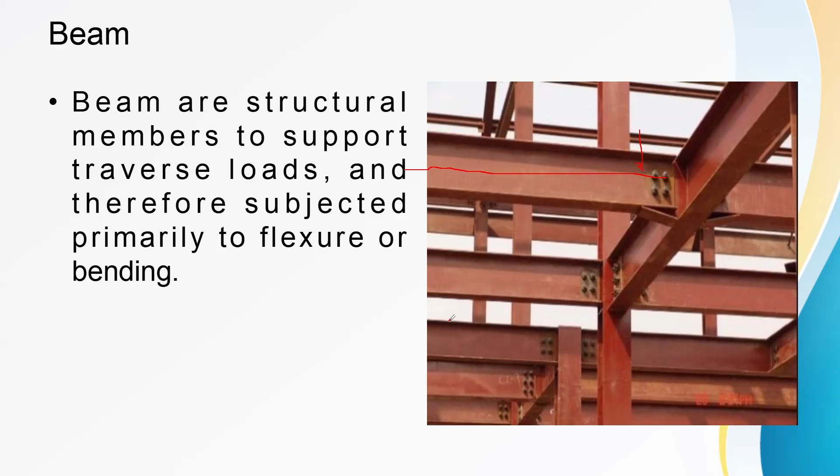We have three types of beams or flexure members that are used to support our slabs. We have our joist, which is the smallest among the three and is used often and abundantly to act as secondary support to ceilings or floors.

The loads carried by the joist will be transferred to the beam, and the beam is relatively larger or bigger than the joist but is usually smaller in number. This provides primary support to ceilings and floors.

Lastly, we have the girders, which are the biggest and strongest among the three and are used on large-scale projects such as bridges and flyovers to transfer loads. The loads carried by the girder will be transferred to the columns that support it.

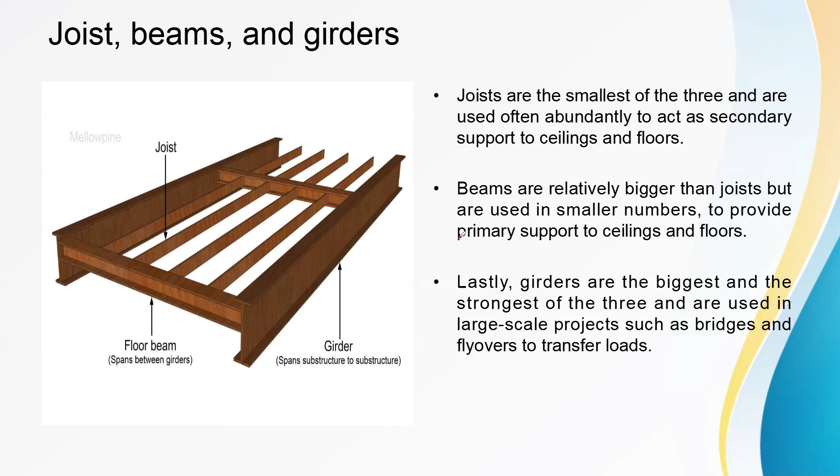Aside from these three, we also have different types of flexure members, and one of them is our purlins, which receive the loads from our roofs. This purlin is supported by our trusses. These purlins are considered members subjected to biaxial forces since they carry loads acting on its y and x-axis.

We also have this type of beam, which is a specialized type of beam that supports loads on the openings of our wall, and these openings can be a window or door. A beam is provided here in order to carry the load over our openings, because if we don't put a beam or support, our hollow blocks or masonry units above the openings would fall or get damaged right away. We call this beam a lintel beam.

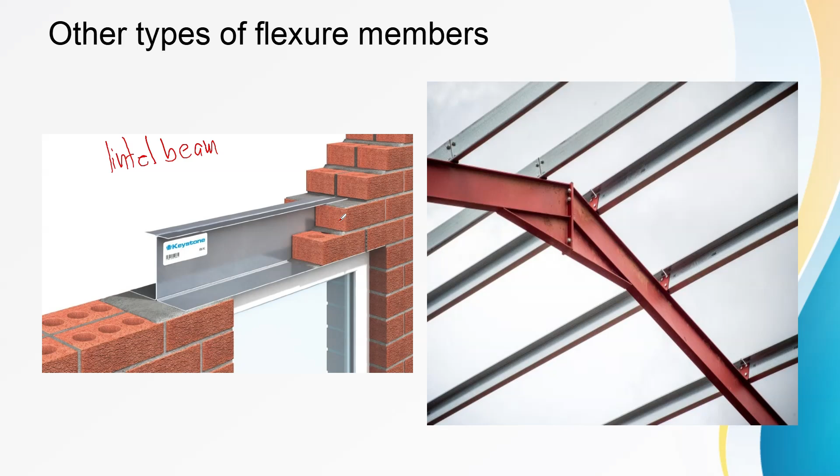Upon knowing what flexure members we will be analyzing, it is also important to know the common sections that we will be using for these flexure members. Most commonly, we will be using our I-shape section. We have several types of I-shape sections; some have a slender flange and a slender web, and we also have I-shape sections that are not doubly symmetric, like this one, which is singly symmetric.

We also have our channel sections, which will be utilized as part of our roof framing system, especially as purlins. That's why they're called C purlins, because their shape is like a C, hence C purlins or channel section.

We also have our hollow structural section here, as well as a circular hollow structural section. We can also utilize our angle section as well as T-section as flexure members, but these are rarely used. We also have circular bars and flat bars or rectangular bars.

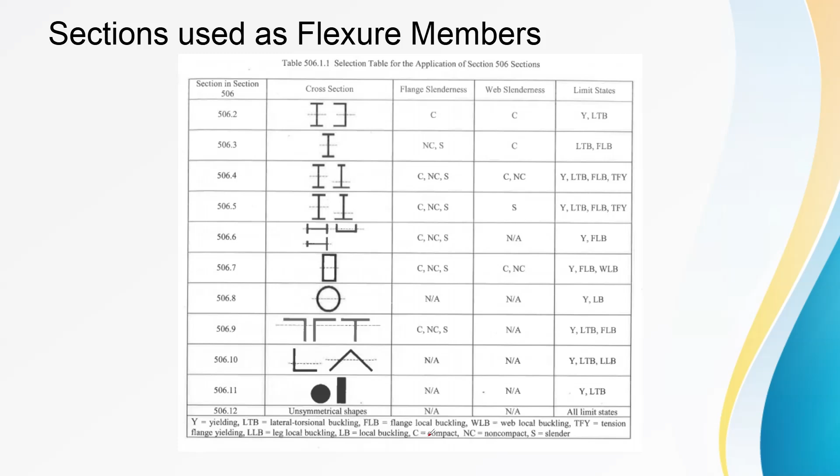C, NC, S denotes the type of classification of our shape. These limit states will be illustrated on the following slides.

This beam, similar to in RCD, is divided into two. The top part usually, though not always, is under compression, and it is the compression side that buckles. Similar to our compression members, which buckle because the load they carry is compression. But in beams, since the section is divided into two parts, one under compression and one under tension, the part under compression will experience buckling, while the part under tension will experience yielding. That's why only the top part buckles, while the bottom stays steady or experiences yielding.

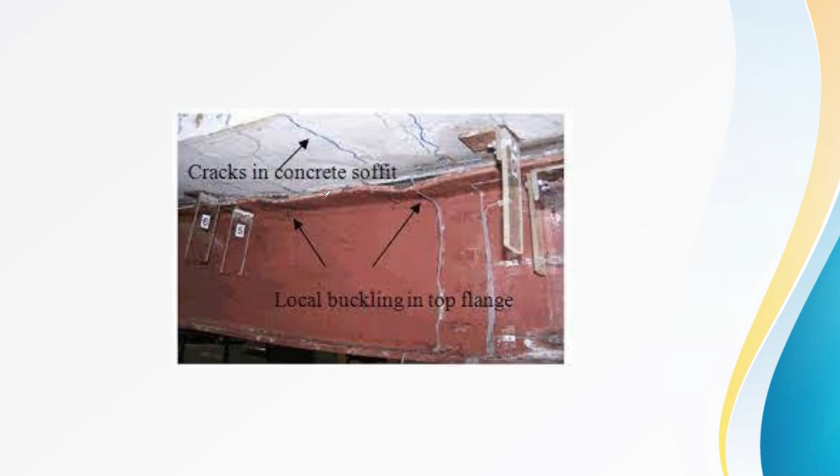Then we also have the flange local buckling. This is a localized buckling because our flange is slender. Because it is slender, it can experience buckling, and it is considered local since the other part of the beam is not experiencing buckling. The compression flange of a beam can buckle locally when the bending stress in the flange exceeds the critical stress. Here we can see that the top part, which is the compression side of our beam, buckles locally, developing a slight deviation.

Then we also have the web local buckling. The web of the beam can also buckle locally when the bending stress in the web exceeds the critical stress. This web local buckling happens if the web is slender.

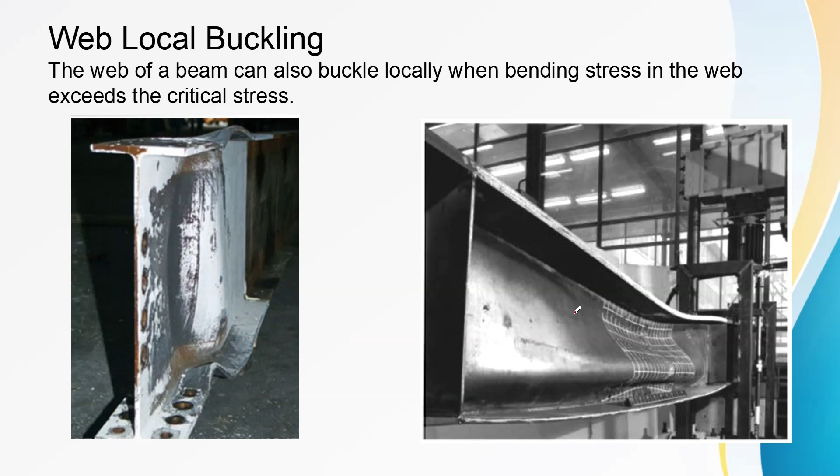Then we also have the tension flange yielding. Here, the part under tension will fail by yielding, happening alongside the failure of the compression side by local buckling.

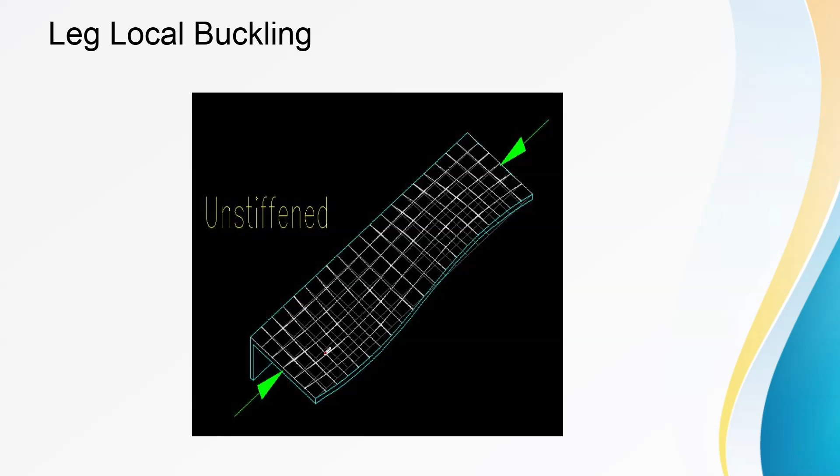Then we also have what we call leg local buckling. This is similar to flange local buckling because the leg is considered slender, and once the applied stress exceeds the critical stress of this angle section, buckling will occur in its legs. Then for our hollow structural sections, such as pipes, they can fail based on local buckling or fracture. Those are the limit states that can occur in our flexure members.

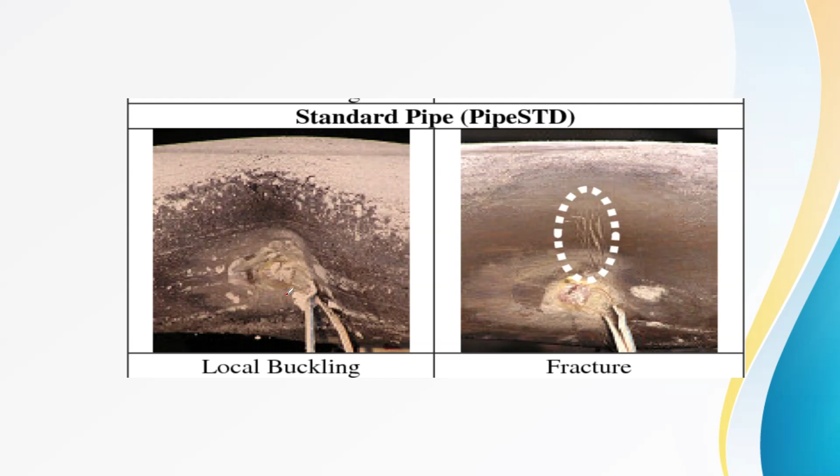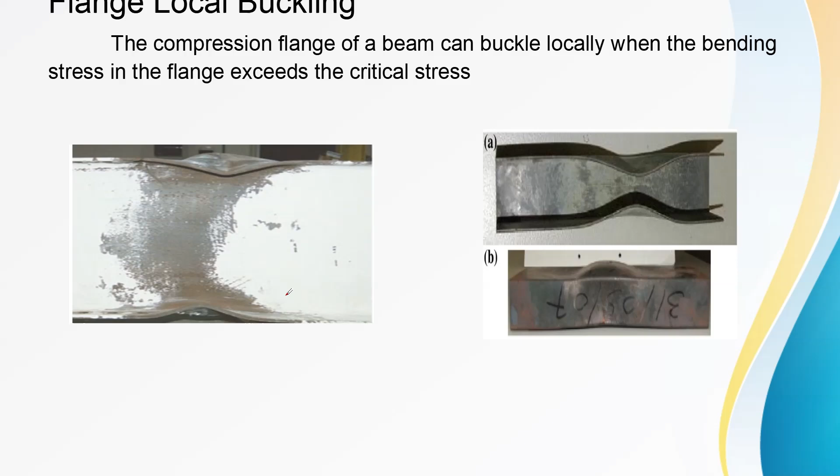But usually, our main concern is yielding, lateral torsional buckling, flange local buckling, and web local buckling, since the other modes of failure will not occur in the sections that we'll be analyzing.

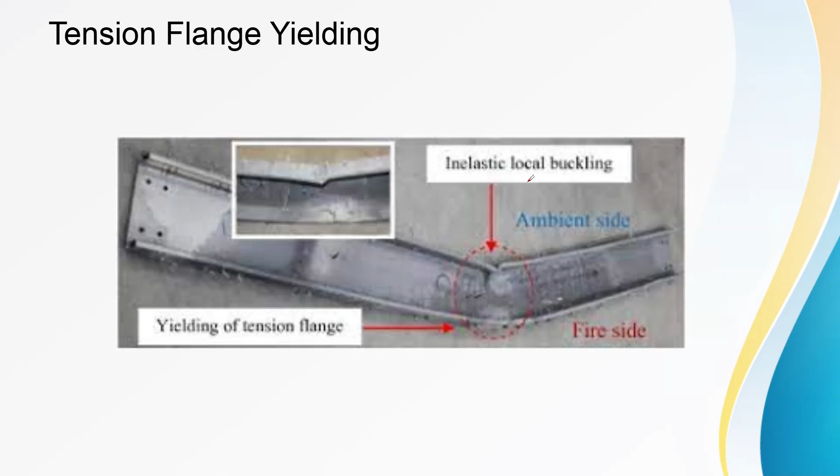For now, we will stop our video here and we will continue discussing bending stress in the next video.

Good day everyone. In this video, we will be discussing part 2 of our design and analysis for flexure members, and this time we will focus on the bending stress.

From our strength of materials, we can recall that the formula for bending stress is expressed as stress equals M times Y over Ix, where this is our original formula: F equals M times Y over Ix. Here, M is the moment at the point that we are going to analyze, Y is the distance of the fiber being analyzed from the neutral axis, and Ix is the moment of inertia of the section with respect to our x-axis.

So if we are going to get the stress at any point, we will use this formula. However, if we are to get the maximum bending stress, this formula must be expressed in terms of the maximum stress, maximum moment, and the maximum distance from the neutral axis and the moment of inertia. That's why we have this formula: F max equals M max, which can be given a subscript, multiplied by C, where C is the farthest distance from the neutral axis, divided by Ix, which is constant all throughout the section. That's why we don't have an Ix max or Ix minimum, since it stays the same.

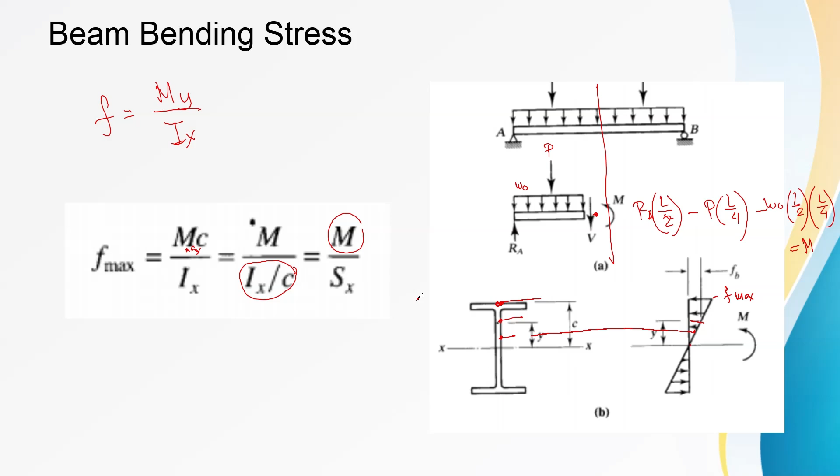After that, we will be analyzing this beam in different loading conditions. But to be able to determine the nominal moment strength, Mn, we must first examine our beam in different beam behavior, the behavior of the beam throughout the full range of loading, from very small loads to the point of collapse.

Here we see this load: a simply supported beam will have a point load applied at its mid-span. Then this point load will be gradually increased until we reach the point of collapse, the scenario shown in illustration letter D.

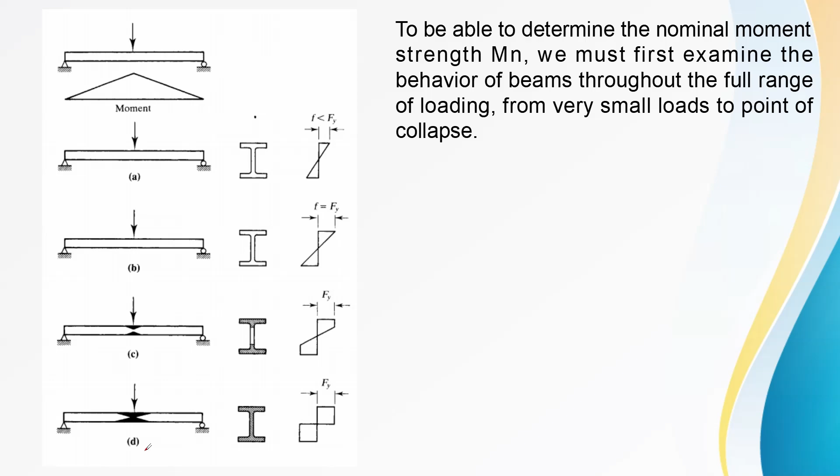In this figure, a simply supported beam with a concentrated load at mid-span is subjected to successive stages of loading. In the first scenario, the applied load is still low, so the resulting moment will also be smaller. Since the bending moment present is low, when we compute the bending stress at the farthest fiber, it is still less than our yield stress.

But when we increase the moment, we reach a load that will produce a moment giving a bending stress equal to our yield stress - this is point B. After reaching point B, where our bending stress equals yielding, the distribution of stress on the cross-section will no longer be linear.

In the first scenario, our bending stress was still in the elastic region. But at point B, it has passed the elastic region and entered the yield plateau, the start of the yield plateau. Once we reach the yield plateau or our yield stress, the succeeding fibers will also gradually yield. The distribution of stress on the cross-section will no longer be linear, and yielding will progress from the extreme fiber towards the neutral axis.

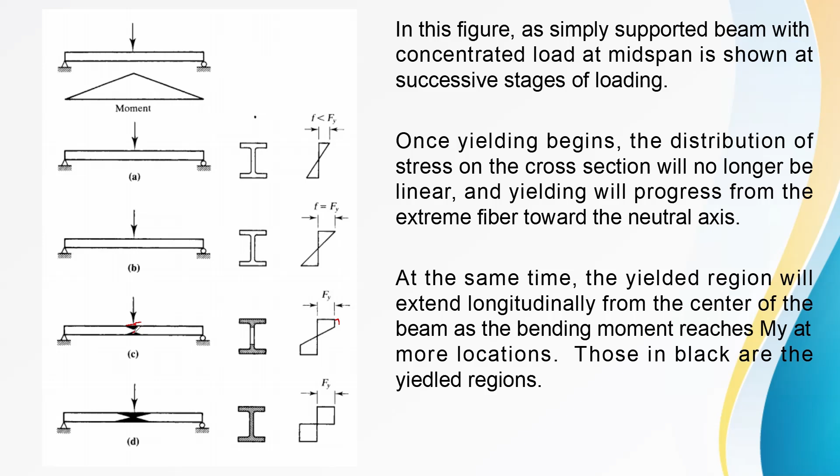Then, kapag lahat na ng ating elements do sa midspan, consider na nandito kasi nag-occur yung ating maximum bending moment, then any further increase in the load will cause collapse since all the elements reach the yield plateau of the stress-strain curve and unrestricted plastic flow occurs. And here, nag-form na yung ating plastic hinge.

Kaya, dahil sa occurrence ng plastic hinge, possible na mag-collapse yung ating structure kapag dinagdagan pa natin yung ating loads. Pero, not necessarily na pag na-form si plastic hinge ay mag-collapse na. Yun pa lang yung verge ng collapse. Pagka nagdagdag pa tayo ng additional load, dun pa lang magko-collapse entirely ating section.

Let's draw muna yung ating stress-strain diagram. Sa point A, nandito siya lang sa part na to or sa elastic region. At kapag within elastic region, may i-apply pa natin si theory of structures natin. Pero beyond the elastic region dito, yung point B dito siya nagsimula kasi nag-yield na yung ating elements. Pero within this yield plateau, unting-unti nag-yield yung lahat ng ating fibers.

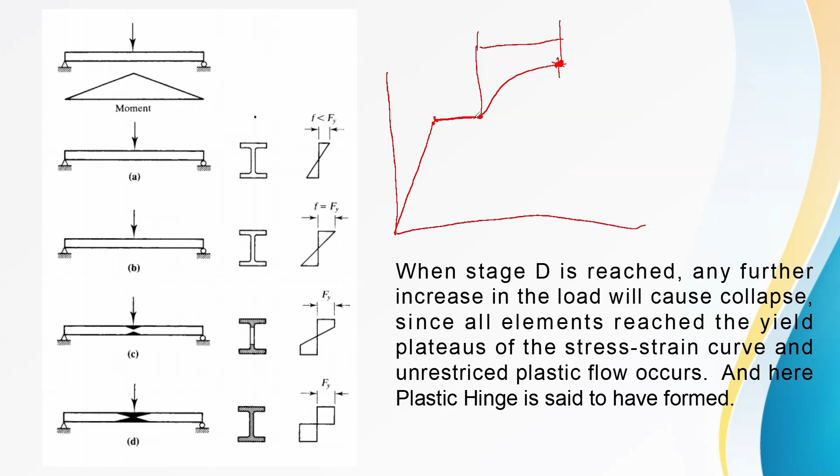Given that, na-form itong ating new discipline of structural analysis, which is itong ating plastic analysis. And this is based on the consideration of collapse mechanism called the plastic analysis. Si elastic analysis or yung nagamit natin sa theory of structure, yun ay totoo lamang if yung ating stress is within the elastic region, pero beyond that elastic region, itong plastic analysis na yung gagamitin natin.

Dito sa plastic analysis, nadagdagan ng imaginary hinge yung ating beam, which is itong tinatawag natin na plastic hinge. Fictitious tong beam na, hinge na to. Para kasing nangyari, lumambot yung ating beam, kaya nagkaroon ng additional hinge doon sa point kung saan nag-form si plastic hinge.

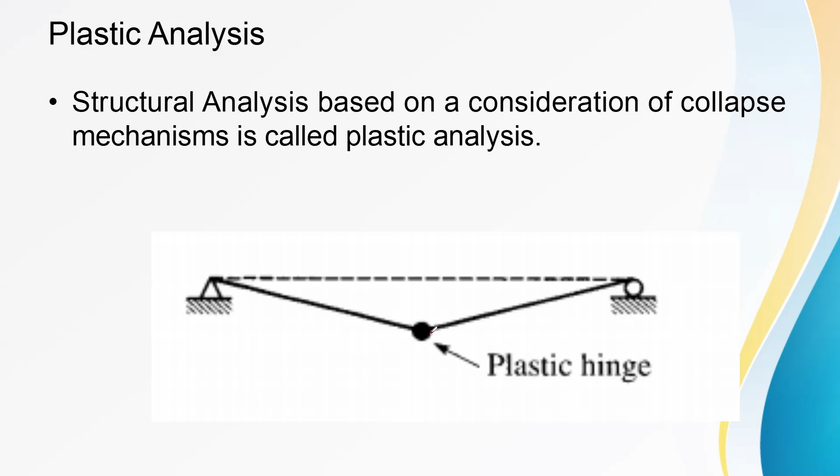And to determine kung ano yung moment na nag-cause ng formation na ating plastic hinge, kailangan natin malaman yung pag-compute for the plastic moment capacity. And itong plastic moment capacity natin ay makukompute natin using this one. Si plastic moment or yung moment na nag-result sa formation ng ating plastic hinge ay natawag natin na plastic moment or MP, and it is a resisting couple formed by two equal and opposite forces.

Our formula for MP or the plastic moment is simply Fy times Z, where Z is yung tinatawag natin na plastic section modulus and yung Fy is our yield stress. Si Z can be computed in various way. Pwede natin gamitin si AC times A or AT times A or A over 2 times A, where yung A na malaki is the total area of our section being analyzed. Then yung A naman is the distance between the centroids of the two halves.

Bakit may A over 2 tayo dito? Si A dito kasi sa ating plastic moment, hinati lang natin yung ating section into two equal parts. That will constitute to the same, or that will give the couple with equal magnitude, but opposite yung forces niya.

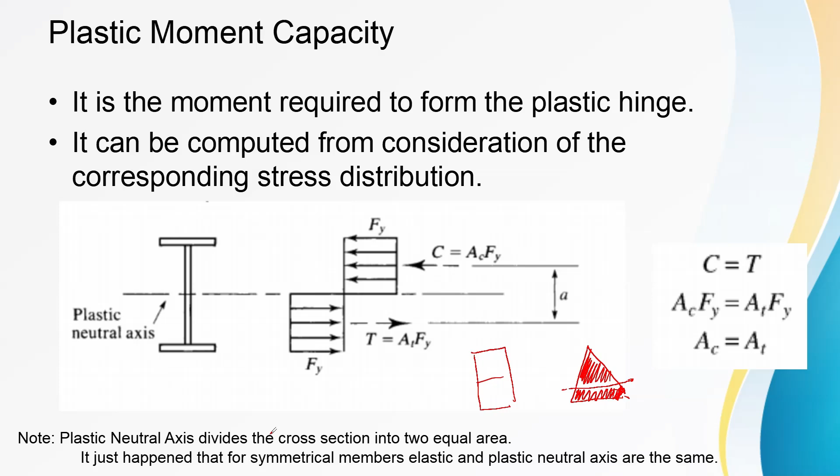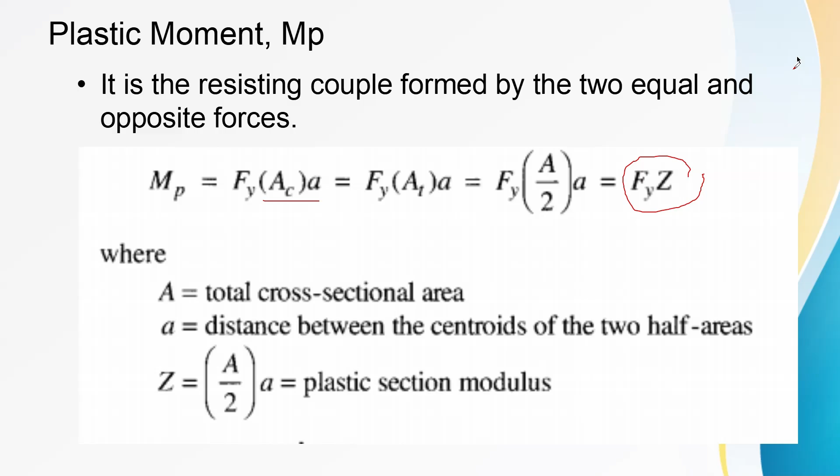Good day everyone. In this video, we will be discussing the concept of collapse mechanism. Collapse mechanism is used in our plastic analysis, and it is helpful to determine the location of the plastic hinges as well as the magnitude of our plastic moments.

In principle, a structure will collapse if a plastic hinge develops. For example, a statically determinate beam loaded as shown will collapse if one plastic hinge develops. If we have a simply supported beam, we only need one plastic hinge for the structure to collapse, and this usually happens at the point where the concentrated load is acting. But if we have a uniformly distributed load, the location of the plastic hinge is at the midspan of the beam.

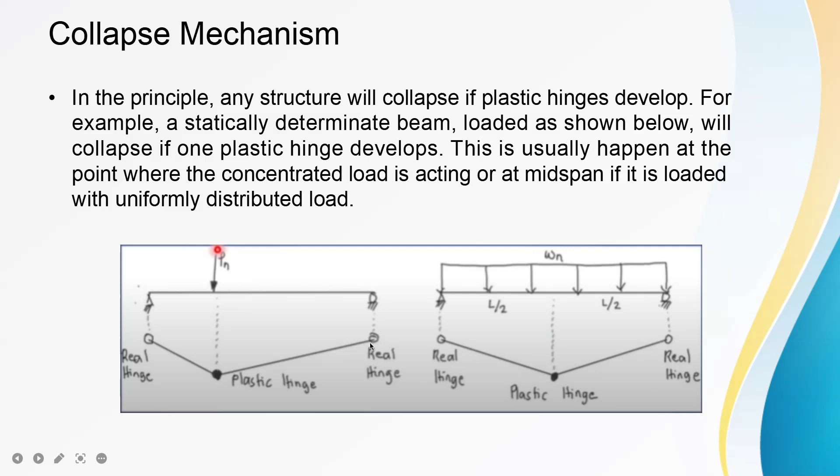Meanwhile, for statically indeterminate structures like a doubly restrained or fixed-ended beam loaded as shown, there is a need for more than one plastic hinge for actual collapse to happen. In this case, two additional plastic hinges develop at the location of the fixed supports. Note that for plastic analysis, the fixed support will start to rotate, thus behaving like a plastic hinge. So for collapse to occur, the stable supports must be converted into plastic hinges.

Like before, the first plastic hinge appears at the location where the concentrated load acts, and when there is a uniformly distributed load, it acts at its center. There are different configurations depending on the type of loading, but these are the usual ones we use: the concentrated load and the uniformly distributed load.

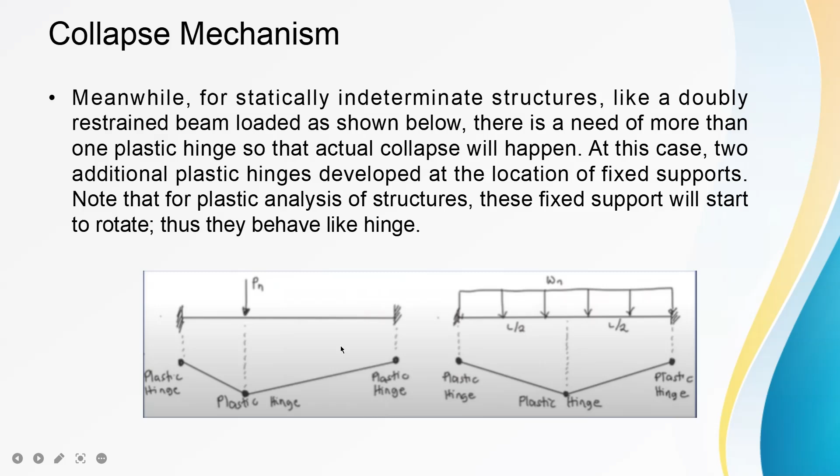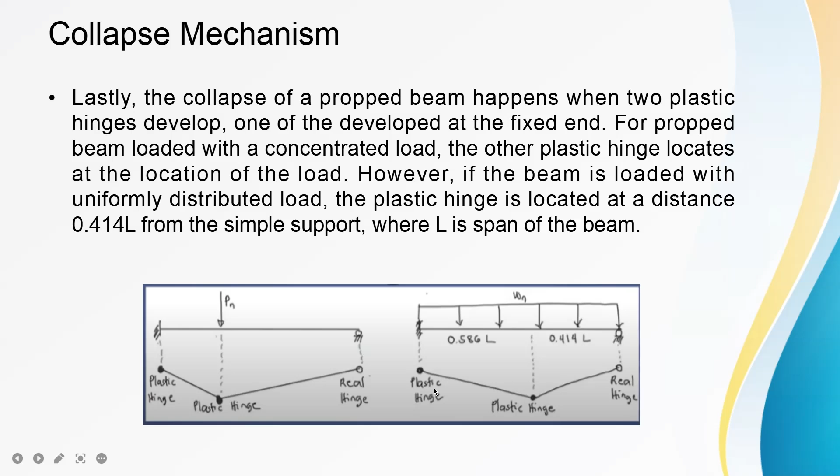That's just the summation of W times the area, and that gives us the total work done for our uniformly distributed load. Then, to compute the total work done by the plastic hinge, it is just equal to the plastic moment multiplied by the summation of the rotations in terms of radians.

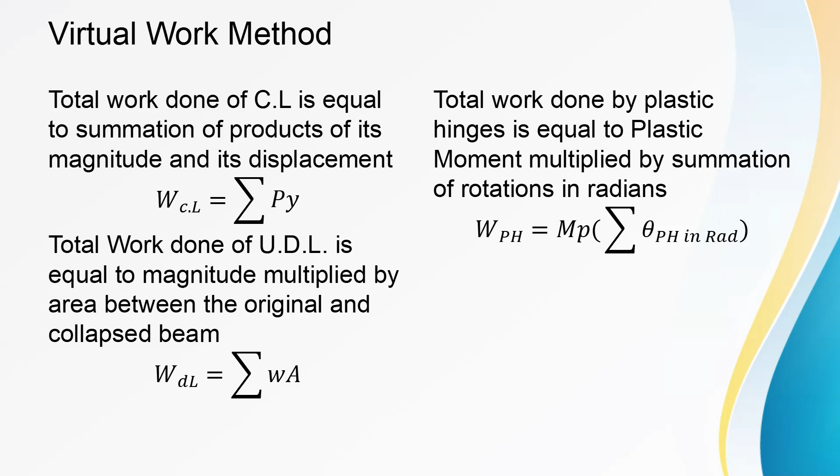Where MP is the plastic moment, multiplied by the summation of our rotations, expressed in radians. In this virtual work method, it is also important to know the small angle theory, that the sine of a small angle equals the tangent of that angle, and both also equal the angle expressed in radians.

This small angle theory is what we used in our area moment method in order to compute our deflections.

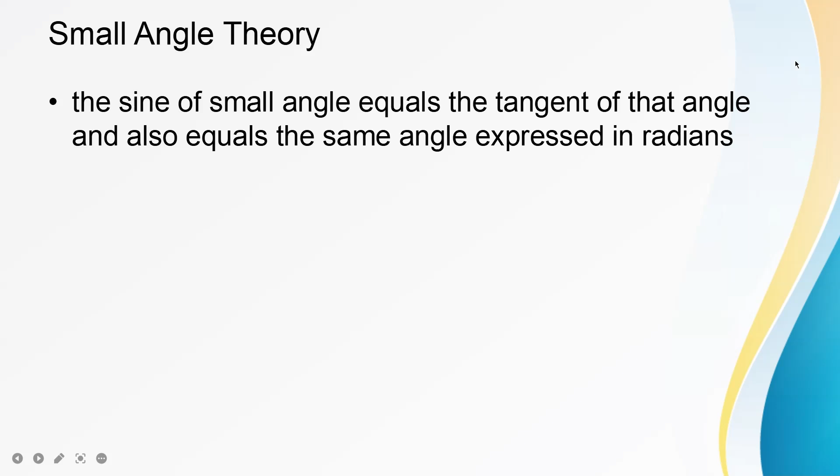Good day everyone. In this video, we will discuss the classification of shapes.

Just like our compression members, we also need to classify our shapes for our flexural members. There are three types of shapes for flexural members: compact, non-compact, and slender. To determine which classification applies, we will base it on our width to thickness ratio, the same concept used for compression members.

Lambda is our width to thickness ratio. Lambda p is the limiting width to thickness ratio for a compact section. And lambda r is the limiting width to thickness ratio for a non-compact section.

If lambda is less than lambda p, considering that the flange is continuously connected to the web, whether it's a rolled section or a fully welded built-up section, then the shape is compact. But if lambda p is less than lambda, while lambda is still less than lambda r, then the shape is considered non-compact. But if lambda is greater than lambda r, the shape will be considered slender.

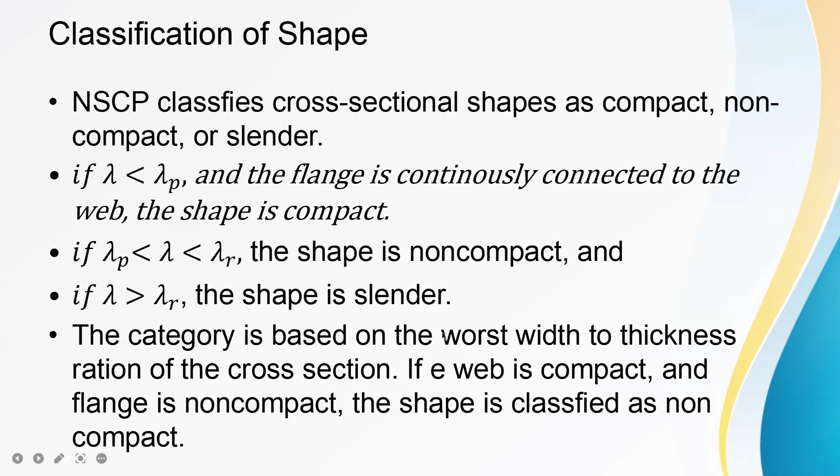The formulas for lambda p and lambda r will also be based on our table of limiting width to thickness ratios for compression elements. But this time we're talking about flexure elements - compression elements are still considered here because the part of the flexure members is still subjected to compression.

The cases we're concerned with are case 1, case 2, case 6, case 7, case 9, case 10, case 13, and case 15 - all the ones with the word 'flexure'. Those are what we'll consider. However, we'll put case 1, 2, and 9 in a red box, since we won't discuss all the shapes - we'll just focus on our rolled up or I-sections, so those are the width to thickness ratios we'll inspect.

However, we can also apply this discussion to our angles and T-sections. That's all for the classification of our beams based on width to thickness ratio. Thank you for watching.

Good day everyone. In this video, we'll be discussing the design for flexure members. The design of flexure members is covered in Section 506 of NSCP 2015.

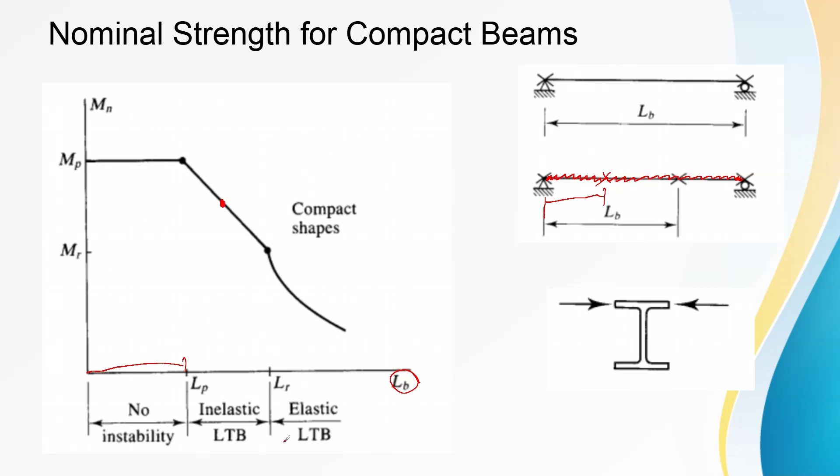And with that, considering that we have compact shape, these are the formulas for that. This section applies to doubly symmetric I-shaped members and channels bent about their major axis having compact webs and compact flange. So it should be compact web and compact flange.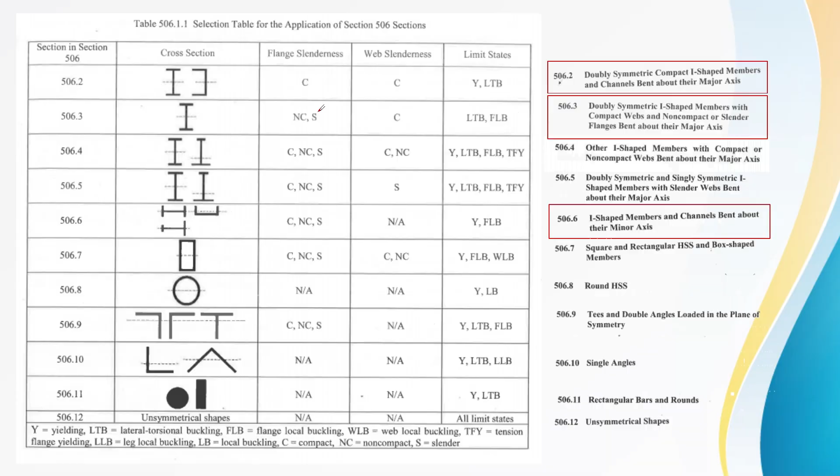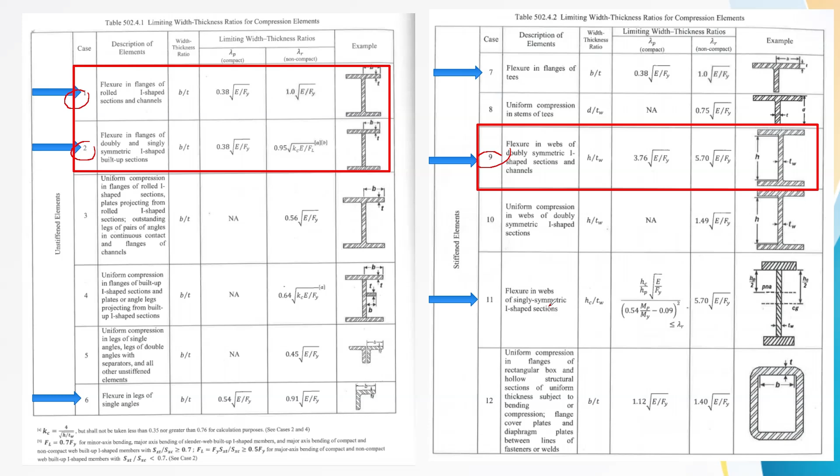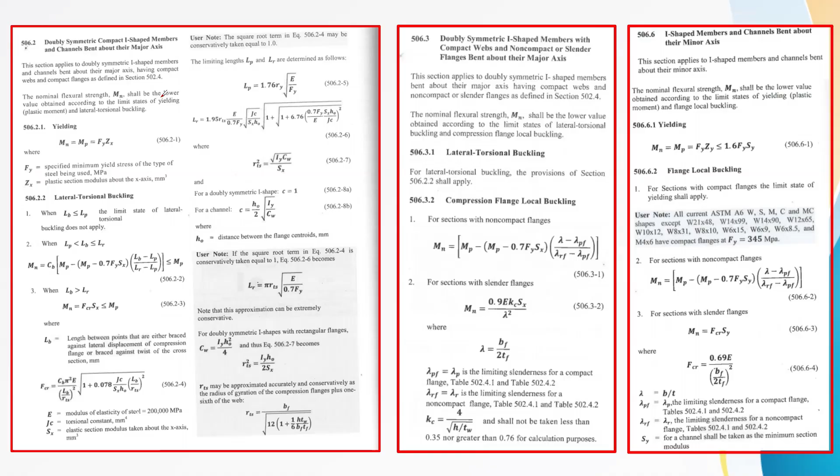Then the nominal flexural strength or Mn shall be the lower value according to the limit state of yielding or the plastic moment, or the lateral torsional buckling. Based on yielding, the maximum moment or nominal flexural moment is just equal to Mp, where Mp is computed as Fy times Zx. Remember that Zx is the plastic section modulus, which is different from Sx, the elastic section modulus.

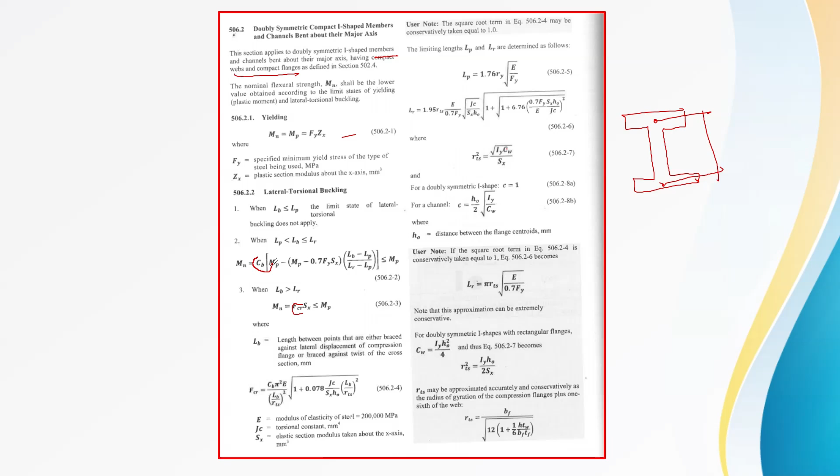And may nabanggit tayo dyan na CB, sa formula natin kanina. And that CB is called the lateral torsional buckling modification factor for non-uniform moment diagrams when both ends of the unsupported segment are braced. Bali yung CB natin na equal sa 12.5 Mmax divided by 2.5 Mmax plus 3 MA plus 4 MB plus 3 MC which multiplied sa RM which should not be greater than sa 3.0.

At ito yung mga ibig sabihin ng mga variables natin dyan. Nasabi din dito that CB is permitted to be conservatively taken as 1.0 for all cases. And for cantilevers or overhang where the free end is unbraced, CB is equal sa 1.0.

And there's a user note that for doubly symmetric members with no transverse loadings between braced points, equation 506.1-1 reduced to 2.27 for the cases of equal end moments of opposite signs, and 1.67 when one end moment equals 0.

Bali, these are the several cases that we can use for the value of CB. We can compute for a CB based on this given formula, but you can also memorize some cases ng CB natin para hindi na tayo mag-compute ng mahabang formula for CB.

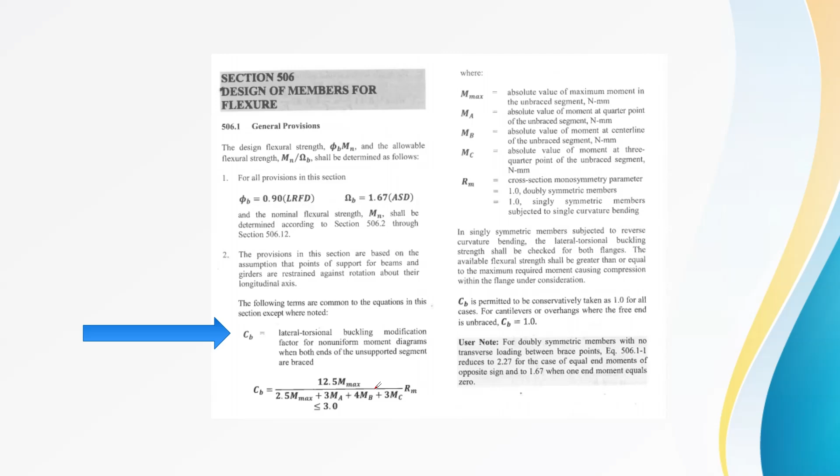Kasi doon, kailangan pa natin i-drawing si moment diagram. Then, determine natin yung mga moments at the quarter points para ma-determine natin si MA, MB, MC, at si maximum moment. But by memorizing this one, this can simplify our process.

Bali, we have here the uniformly distributed load over a simply supported beam at yung CB niya is 1.14. But if we introduce additional lateral support dito sa ating simply supported beam, magiging 1.30 yung ating CB. Then, nakalista yung other value ng CB pa dito sa ating slide.

Then, our formula for the nominal strength of non-compact shape, ito siya. This section applies to doubly symmetric I-shaped members bent about the major axis having compact webs and non-compact or slender flange as defined in 502.4.

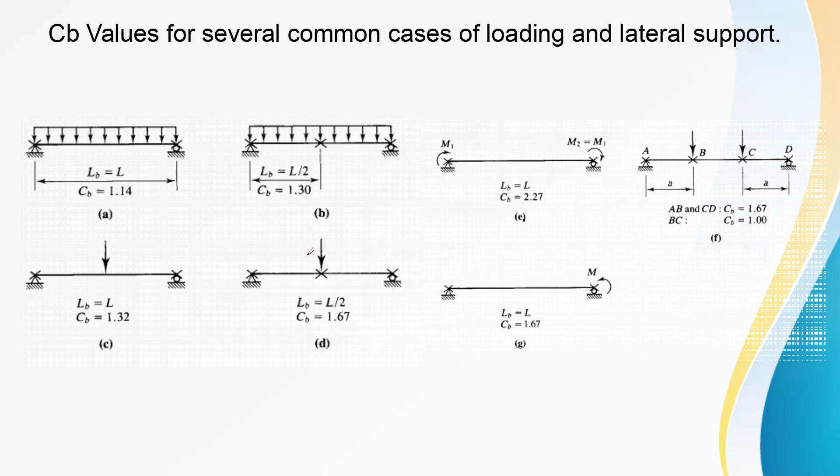The nominal flexural strength Mn shall be the lower value obtained according to the limit state of lateral torsional buckling and compression flange local buckling. And yung computation for the lateral torsional buckling will be the same dito sa provisions natin dito, gayahin lang natin yan. But the computation for the compression flange local buckling, the formula will be this one.

Mn equals MP minus MP minus 0.7 Fy times Sx, multiplied sa lambda minus lambda PF sa flange yan, divided by lambda R ng flange minus lambda P ng ating flange. Bali, flange lang kasi nag-uusapan natin.

Then for section with slender flange, our nominal flexural strength will be this one, 0.9 E times Kc Sx over lambda squared, where lambda is BF over 2TF. Bali yan din naman yung nasa formula natin dun sa 502.4 natin.

At yung Kc daw is equal sa 4 over square root of H divided by TW, and that should not be less than 0.35, but within dapat siya sa 0.35 to 0.76. Bali in between those two values dapat yung value ng Kc natin.

Whereas for the nominal strength ng ating minor axis bending, this will be our formula, MP, based on yielding that's Fy times Zy, and that should be less than or equal sa 1.6 ng Fy times Sy. Take note na may Y tayo dito, at na-denote lang niya that yung ating plastic section modulus ay with respect sa y-axis as well as yung ating elastic section modulus.

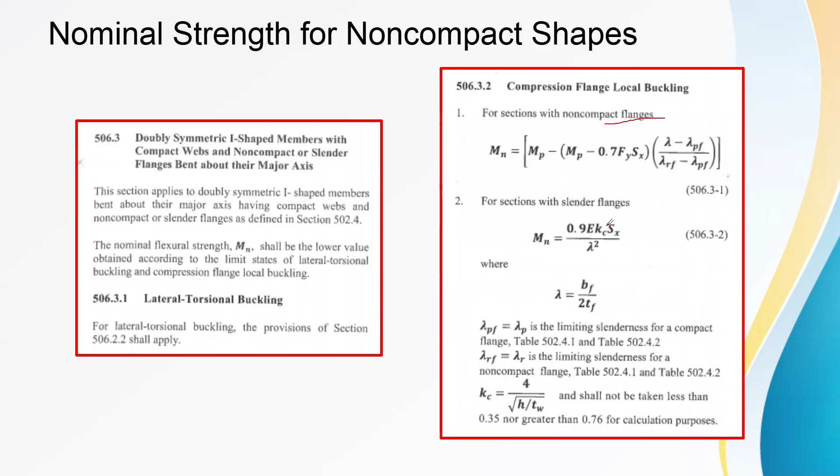Bali, magiging kamukha din halos siya nitong nandito. Kaso, pinagkaiba niya, iba yung coefficient. Then, hindi natin consider si Kc. Bali, that will be the formula natin for the minor axis bending.

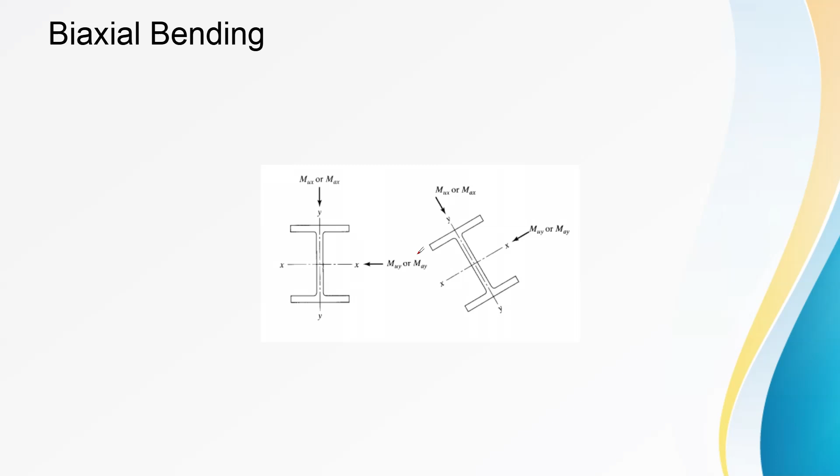Then, we will have the biaxial bending. Bali, si biaxial bending is just a combination ng major axis bending natin plus the minor axis bending. And this usually happens sa mga trusses natin, kaya sa purlins rather. Kaya, we will be discussing the solution for or the design of our purlins under this section. But we will have that during our face-to-face classes.